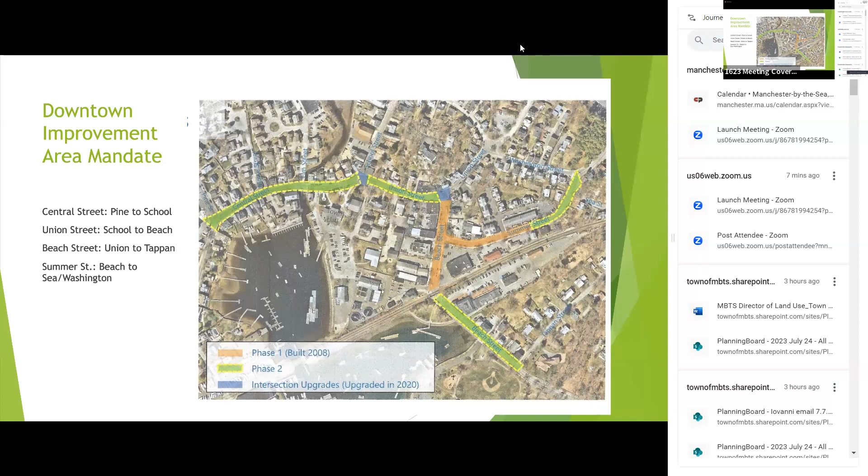Next slide, please. No, that one? Yeah, there we go. This is our secret master plan for downtown Manchester.

Now, sadly, that kind of look and feel and quality of maintenance is not the reality. And the motivation for this project is we have taken a very critical look at what the reality of Manchester's downtown infrastructure is compared to what we would like to see.

So the next few slides give you some pictures of what we are concerned about. A lot of these things we kind of look over because we live here and that's how it always has been, and we're used to it. But if we look at it from a critical point of view: is this the kind of place that a business would want to come to, that shows this town really cares about its downtown, that it's a high quality place to do business? Would people at some subconscious level see a place that is inviting, well maintained, and generally high quality? These are the kinds of things we're trying to get at.

There's too much of our downtown which has uneven, poorly repaired bituminous sidewalk. Many of you may walk down Central Street and take a close look underneath, or notice the absence of curbs altogether, or haphazard bituminous curbs rather than the high quality granite curbs that we're proposing to put in across downtown.

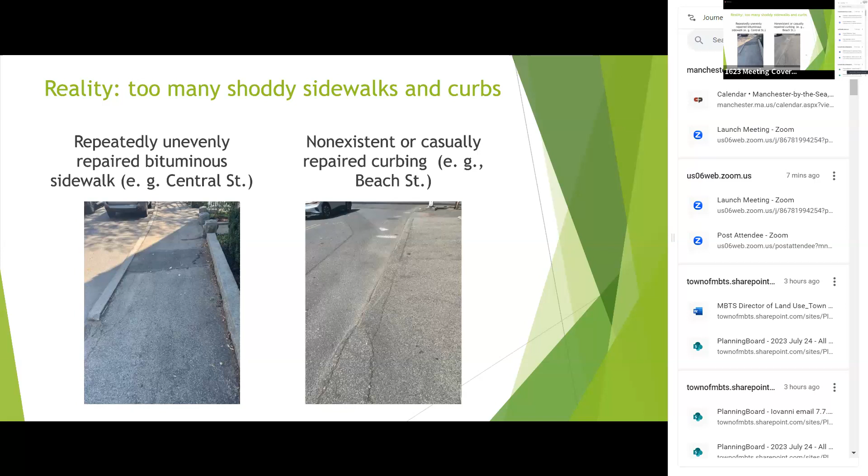Next slide, please. We also note that the introduction of modern amenities has been haphazard, and if you take a critical look, it really doesn't fit with the image we would like to have in a historic district. These look like they escaped from a 1950s horror movie. We would like to extend the historically correct lamps that were put in during downtown phase 1.

Similarly, there are haphazardly installed overhead wires rather than undergrounding. We should mention that DPW warns us that actually undergrounding them involves negotiations with utilities and may be very complicated, but for starters, we wanted to underground anything in the downtown area. Next slide, please.

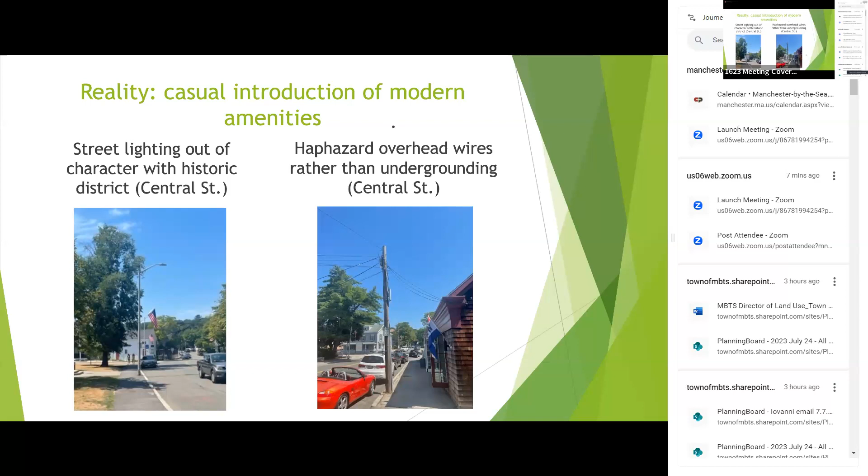The other thing that we paid a lot of attention to is pedestrian and bike availability and safety. There's not a lot of room downtown, but we've gone to great lengths to try to get the best possible compromises in place for all users, so that we have safety, mobility, and accessibility as much as we can without radically changing the picture of downtown.

So this is just one example where there is no crosswalk between Pine Street and Elm Street. That's one place where we're going to put in a fresh crosswalk. Similarly, on aesthetics and general amenities at the edge of the downtown infrastructure, there are a number of places where the railings are simply aging and ugly, and where we can use some more street trees. So those are the kinds of things that we're concerned about.

I should mention at this point that these kinds of things are entirely compatible with the civic space work, which has been briefed to us, and many of our members have been out in the field with civic space. They sort of just meld in with what we have here for the hardware and the infrastructure.

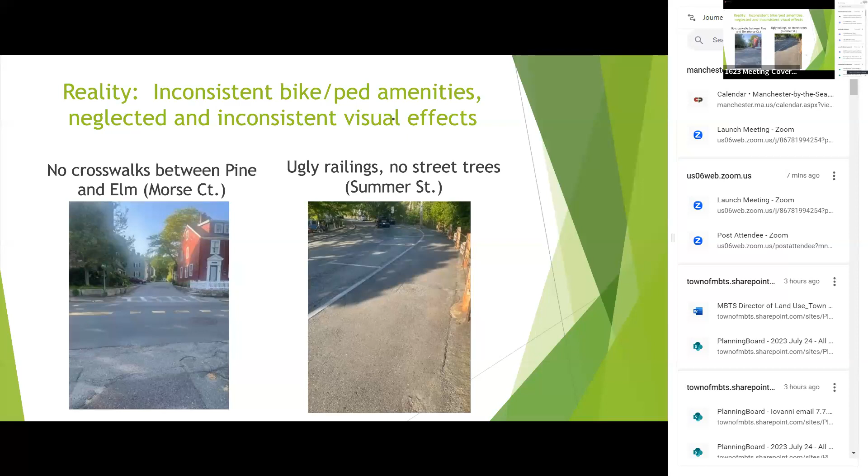Next slide, please. So just to sum up, what we're talking about here is consistent, high quality sidewalks, curbing, and lighting. We believe that since this is downtown, the heaviest use area and the most visible area, it is worth installing high quality cement sidewalks and granite curbs, which will reduce the cost of patchwork repairs. We're concerned, as we said, about safety and usability.

We would call attention to the fact that everyone is concerned about the advantage of having businesses in the limited commercial district, and that's fine. Our charge is to be paying attention to our existing commercial district. We want to have a place that's inviting for customers and new businesses alike.

I mentioned the historic concern that we have. And the last thing is that we want to integrate this with the other downtown public works, as has been done with the complete streets work earlier and will be done with culvert work. The idea here is that we may not do all this at once, but every time we do something downtown, we have this in the back of our mind so that it's all integrated work as it gets completed.

So with that, I'll turn it over to our professionals, Chuck Dam and VHB, who will explain this very professional, detailed work that has gone into implementing these general objectives.

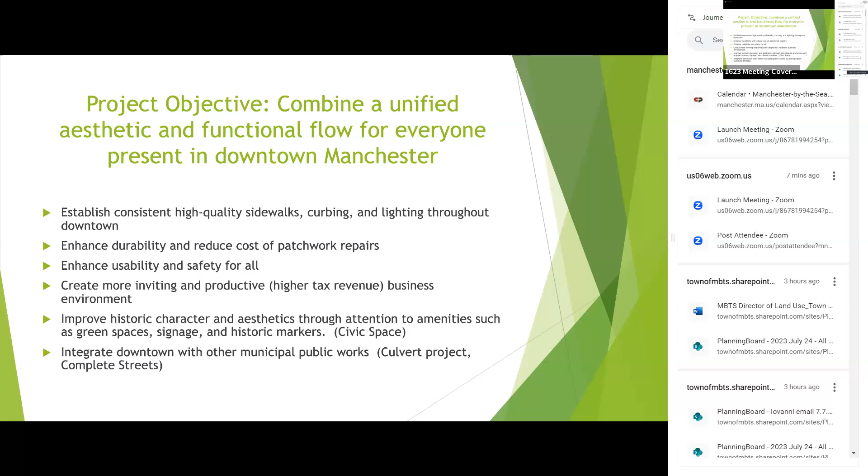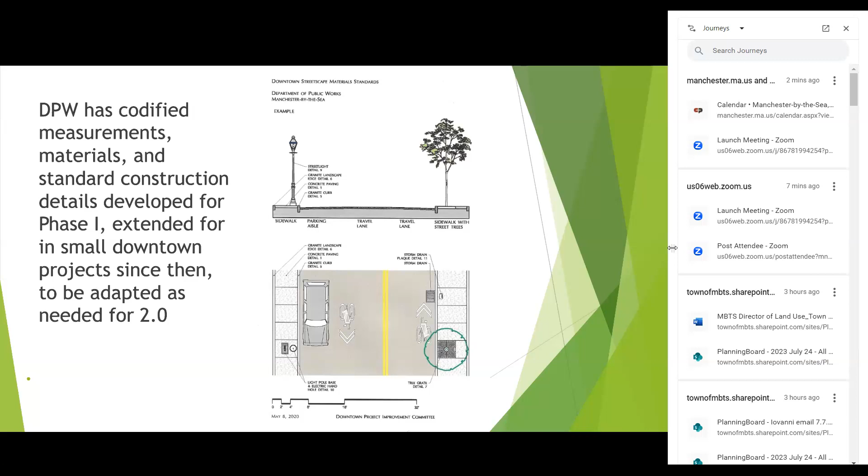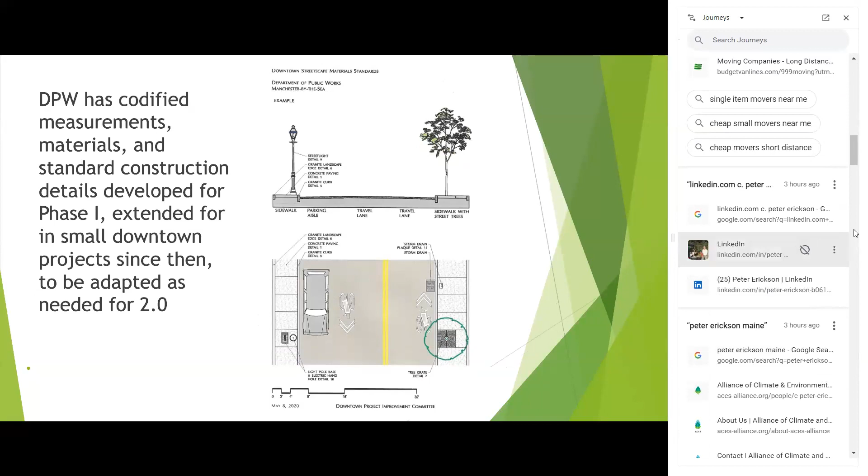Thanks, Steve. This is Chuck. I guess I'll hand it over to Elsa, who's our consultant with VHB, who gave a presentation. Can you hear me? Yeah, okay. I think she'd be the one to walk us through the project as she did a couple weeks ago with the select board, and I think it pretty much speaks for itself, but obviously we'll stick around and take questions afterwards. I'm not sure who's in control of the screen, but Elsa Chan is the consultant with VHB on the call tonight. If we could let her share her screen, I think she'll be able to walk us through it. What's the name? Elsa Chan. Okay, hold on.

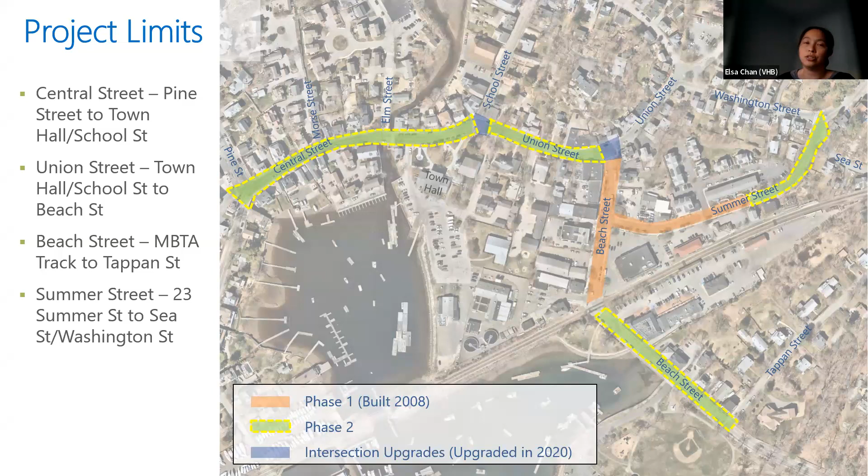Just looking back, Steve already covered the project limits. We're looking at taking the end of the project limit from phase 1, from Central Street, from Pine Street to Town Hall, and then Union Street between School Street and Beach Street, Beach Street, and then Summer Street, just east of where the project limits are from phase 1, and also along Beach Street as well.

So part of the tasks and scope we have is to solicit feedback from what you guys liked and didn't like about the phase 1 improvements, to understand what you guys are concerned about. A couple things we heard: retain the existing parking counts within the downtown area, improve safety and connectivity, improve the aesthetics, and use durable materials for the phase 2 portion of this project. So the first task we did was to identify existing conditions.

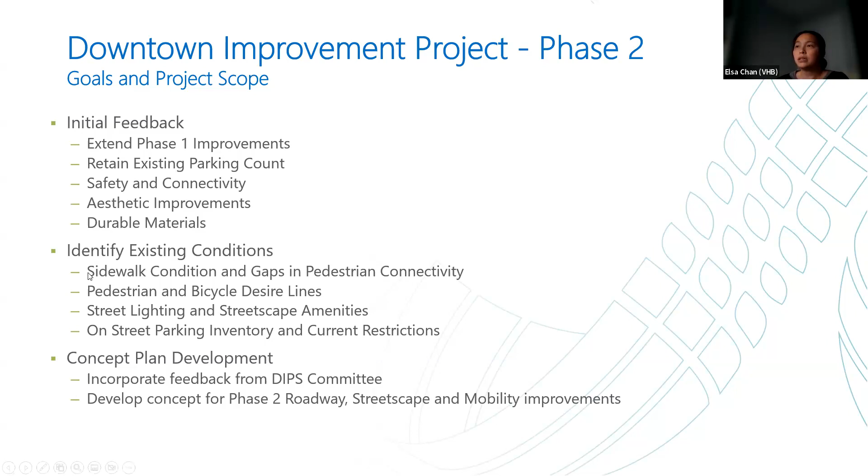We did a site walk to understand the existing sidewalk conditions and gaps regarding pedestrian connectivity, some of the desire lines, the existing street lighting and streetscape, and also the existing on-street parking situation and restrictions. Then we incorporated feedback from the DIPS committee based on the site visit and some preliminary conceptual design, and came up with the concept we're presenting here for the phase 2 roadway, streetscape, and mobility improvements.

Moving down to Union Street, right outside the library, based on our understanding there was a tree before and they pulled it out, so there's this awkward bump out located right in front of the library now. Moving down to the crosswalk, there are accessibility issues.

The curb ramps are not accessible. On the right side, the picture shows that because of the parking along this portion of Union Street, vehicles often have to cross over the center line, which creates a safety issue with people straddling across to the other side of the roadway just to bypass the parking.

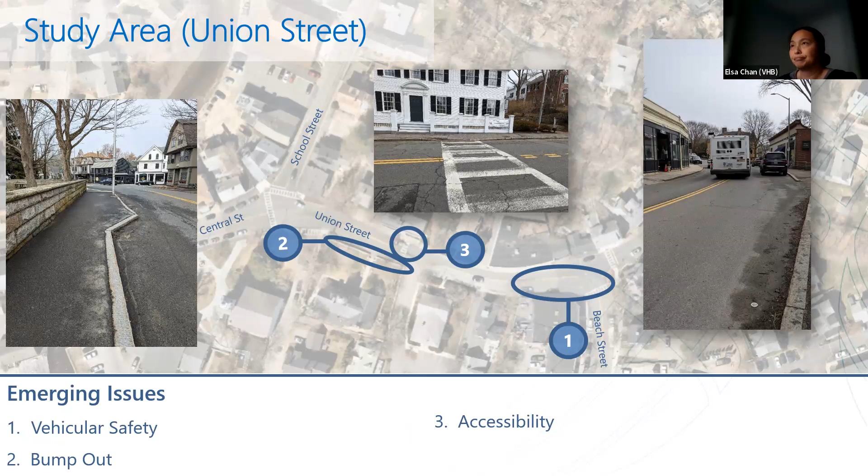Along Beach Street, some of the identified issues include pedestrian connectivity and wayfinding issues. The fence itself along Beach Street is also kind of antiquated, old, and not the prettiest looking. There's also a pedestrian safety issue right outside Captain Dusty's, especially during the summer months when it's pretty popular, so improving pedestrian safety at that location is needed.

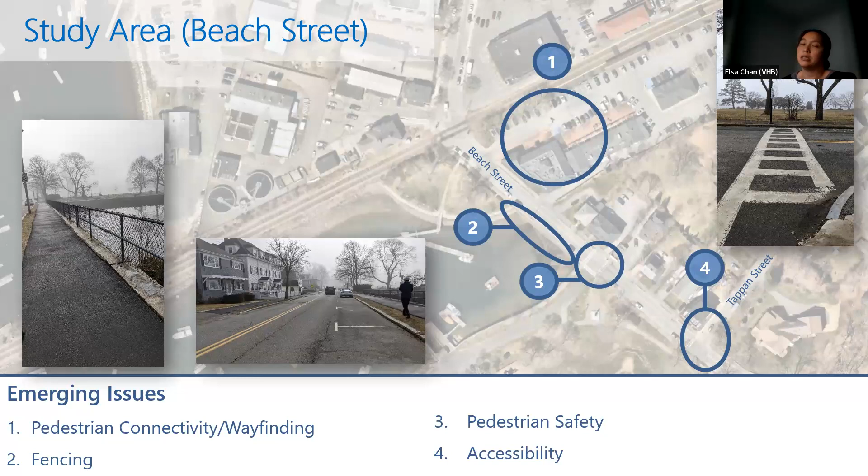The fourth issue is at Tappan Street, the crosswalk. As you can see here, there are no curb ramps - it just literally runs into the curb. Accessibility is an issue at this location.

Along Summer Street, the Sea Street at Washington Street intersection has some challenging operations and safety issues, especially from Sea Street - it's kind of hard to see people coming southbound on Summer Street. There's also no formalized parking, even though there's 2-hour parking along this stretch, so it doesn't look very inviting for visitors to park here. Lastly, the guardrail and railing alongside this stretch of Summer Street is substandard as well.

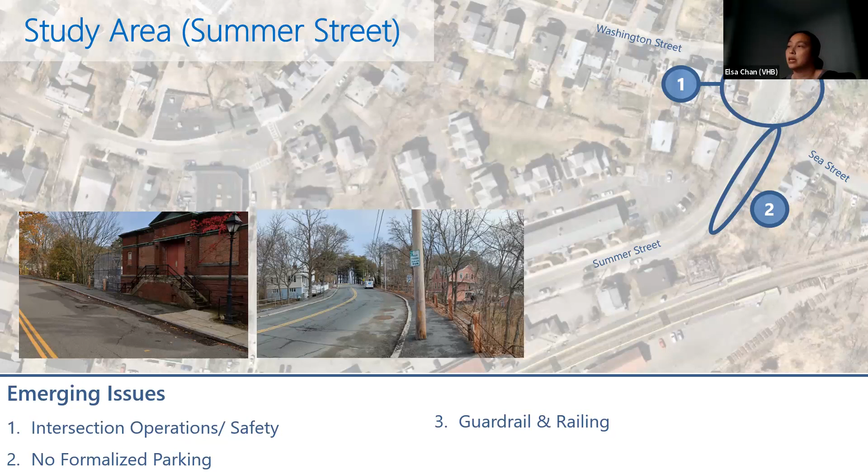We talked to the DIPS committee to understand the extent of improvements we want to see under phase 2. We want to echo what phase 1 had: upgrading sidewalks to cement concrete, upgrading curb ramps to be ADA compliant. However, we want to keep the curb lines as is, no significant roadway construction, and better define parking and improve crosswalks and crossings along the project limit corridors. If we do have to reconstruct curb lines, it'll be more toward improving pedestrian safety.

As far as study area-wide improvements, there will be new sidewalks and curb reset along the corridors within the project limits. Pedestrian and street lights will also be upgraded as part of this downtown improvement phase 2, upgrading accessibility at sidewalks and crosswalks. However, we want to maintain the existing pavement width and existing parking within the study area, and also improve the landscape at the sidewalk along Beach Street and at the park edge.

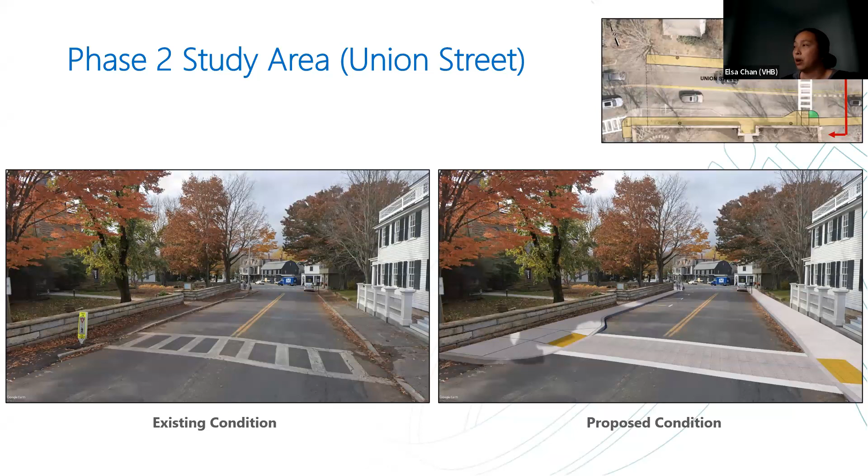Down to Beach Street - the existing fencing will be upgraded to decorative bridge railing, with new concrete sidewalk. We'll also provide a grass or paver buffer adjacent to the sidewalks. Right outside Captain Dusty's, there's a raised table being proposed, which aside from increasing visibility of pedestrians, also serves as a traffic calming measure to lower speeds along this stretch of Beach Street. Lastly, all the curb ramps and crossings will be upgraded or constructed to be accessible.

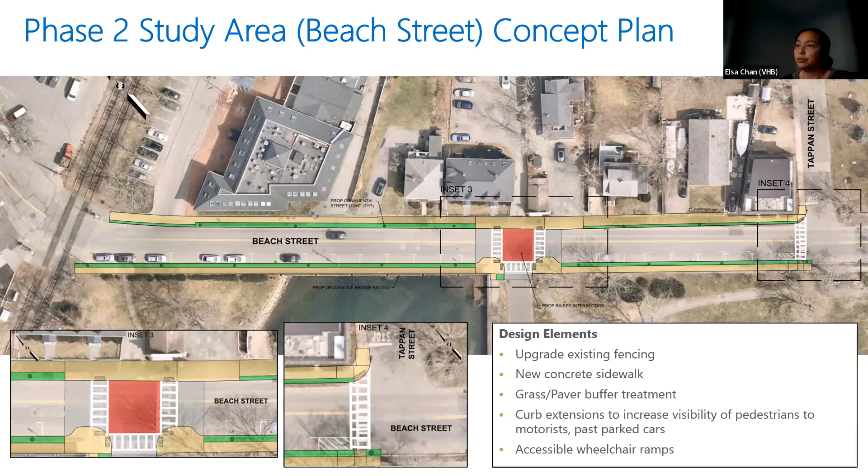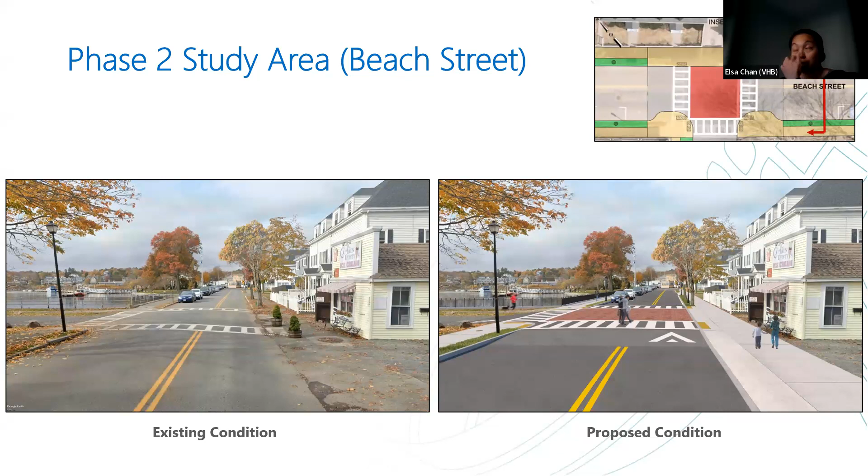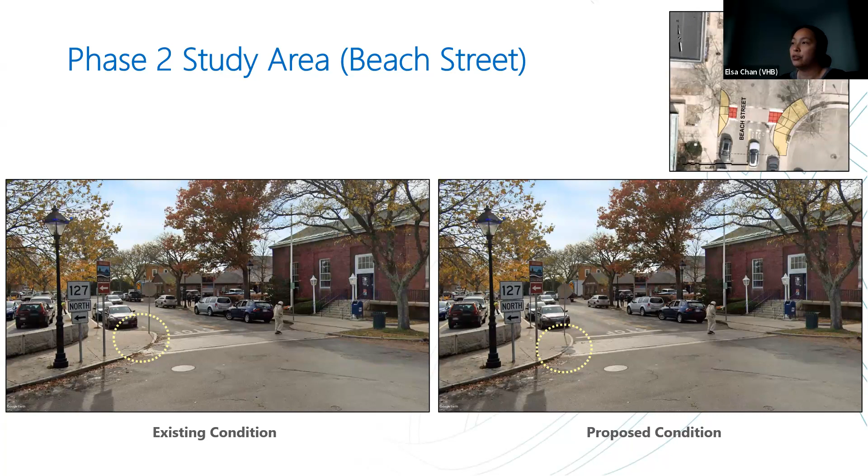This one is kind of added in afterwards. This is right outside the post office. You might not see it as well here, but on the left side is the existing condition. It was brought up that the space right in front of that circle is kind of hard to back into because of the angle of the curb over there, so we proposed to cut it back a little bit. You can see on the right side it's cut in about half of the car, just to make it easier for someone to back into that spot.

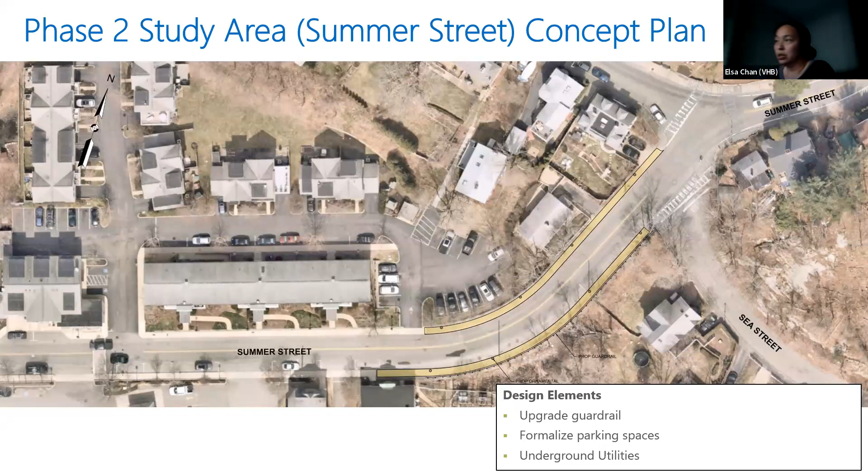And then along Summer Street, some of the design elements we've incorporated into this conceptual plan are to upgrade the existing guardrail so that it meets current standards, and also formalize the parking spaces, providing some wayfinding so that visitors can know there are spaces to park along this stretch of Summer Street. There are also some utilities here that would be good to underground, but these are more long-term improvements that would require coordination as well.

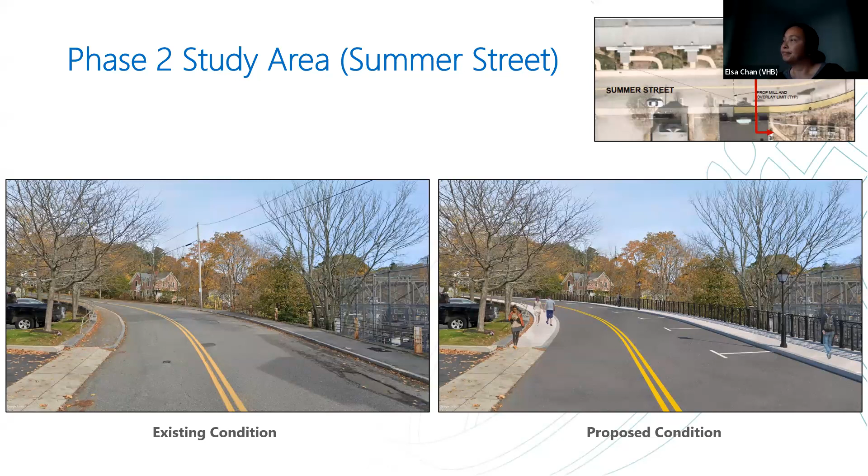So here's a cross section you can see on the left, which is the existing condition. On the right side, as you can see, there's some ornamental street lighting, some formalized parking spots, the bridge railing that's been upgraded, and then concrete sidewalks along both sides to tie into the phase 1 project limit. And then that's it.

So this is what our committee has been working on, and after a lot of work with our professional colleagues on compromises and trade-offs that we thought were optimal, we're recommending that to our elected leadership.

The proposed lighting, is it similar to what's in town now? It is. It will be updated, there have been some technical problems and improvements identified with the exact fixtures we had before, so that will be updated, but it will be visually the same.

So Ron, may I speak to that? A lot of them were blown out. Yeah, so the intent is to provide consistent design all the way through, be it curb line, be it concrete sidewalk, be it the lighting features, a little more consistency. One thing on Kurt's mind, and mine too, is we try to provide a consistent, clear path for traffic as it travels all the way from the Beverly Farms side, through the town, and exiting towards Gloucester.

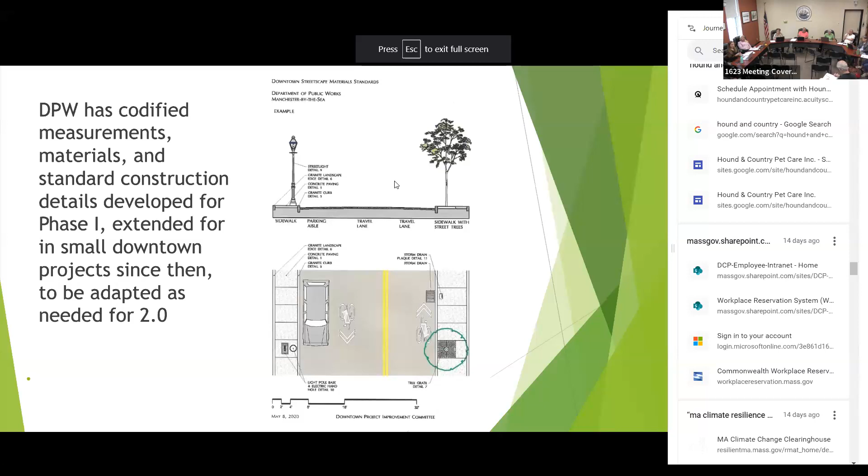When you're going up, let's say Laughing Gull is on your left, can you bring that up? Even in front of the mooring is a perfect example too. I almost got killed there, that area, but it's consistent. I know it's a catch-22, we need the parking, we don't want to get rid of a spot. Is that a place where the curb lines maybe have to modify to maximize both the sidewalk and enable whatever parking is needed?

Parking in front of the mooring and the Manchester by the Book doesn't make any sense to me because it's so difficult for a biker. So in front of the mooring is one spot, and then if you're going up Summer Street you've got Laughing Gull on your right, and you're going up by the old cemetery on your left, winding up the hill there. There's parking spots, and I always laugh a little because there's no way a car could be parked and a car could come down without somebody pausing. So I'm wondering if within this plan everything's staying the same size, or are we going to try to accommodate so we aren't going into oncoming traffic to get around parked cars, like you do in front of the mooring. I really hope so.

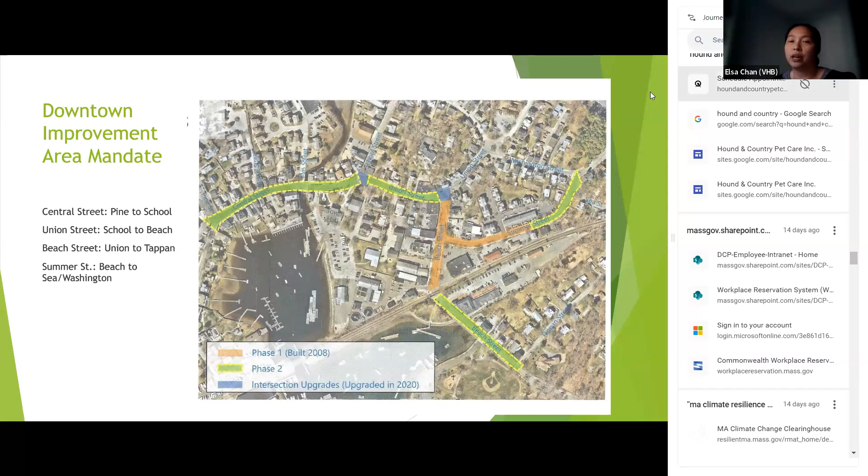Elsa, are you still on the line? I am. So with regards to Summer Street, there's actually existing parking out there already. We're just kind of putting parking spaces just to formalize that. It's not really changing the width of the road or the travel lane. Everywhere we're trying to achieve is to have 11-foot travel lanes along the roadway there.

But at no time are we going to reduce the width of the travel lanes below effective design principles. Correct, so we want to make sure there's minimum width. I'm not sure exactly how to answer your question, other than we'll certainly look at it.

Maybe nothing can be done, but I see it on School Street, Lower School Street, where we have a parking lane but a car can't actually fit there. So they're over the line when they're parked. That means the car coming down can't fit if a car is coming up, right? So it creates all these little pockets in town that get risky.

So noted. Thank you. We certainly heard the question. Thank you.

We call that character in Manchester. I know, character, that's what it is. A what? Character. I didn't hear it. Character.

So no, I call it really dangerous. And I've asked this question over and over again. If we're spending this money and we're doing it, we're keeping the situation dangerous. I have to travel down School Street all the time. I think if there's not enough room for a car parked and someone to travel on a main thoroughfare in town, we need to eliminate the parking.

It's not safe. Specifically School Street, we just paid a ton of money. People, it looks ridiculous that cars are parked over the line and you need to go into opposing traffic. I've sent several emails. We can take School Street at a different time, but the fact is that the bylaw is what allows people to park in this town, not the lines.

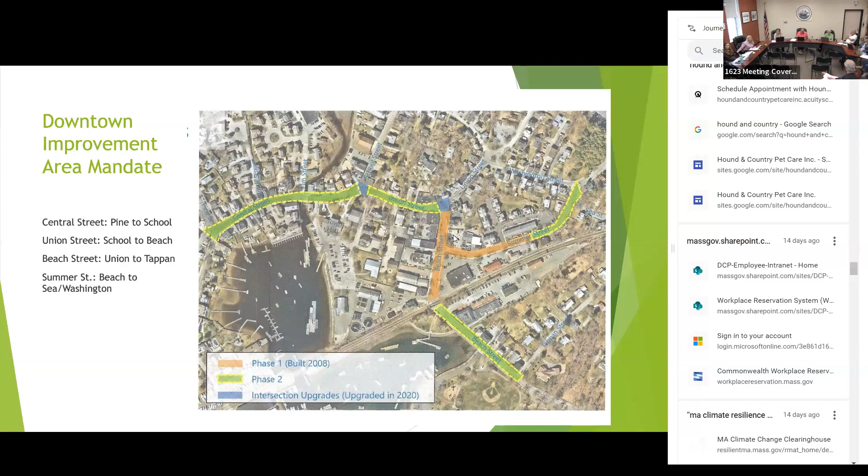It was in the first scope. No, it was in the other one, it was in Elsa's, what it might look like. Pull up that slide if she's still around. Yeah, she's still there, sure, I can do that. Hang on, I think it was like the first intersection, if I'm wrong.

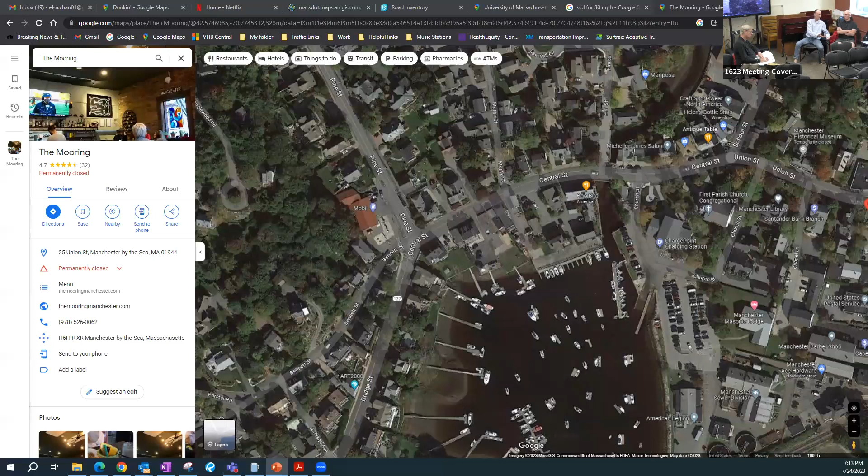I wholeheartedly agree with you. I live right there and I can see it out my window of my house, so I hear all the cars going through there. It's definitely not something we've done as part of this, but it's on the table, that when we do any implementation, this is part of it, because that's one of the worst intersections.

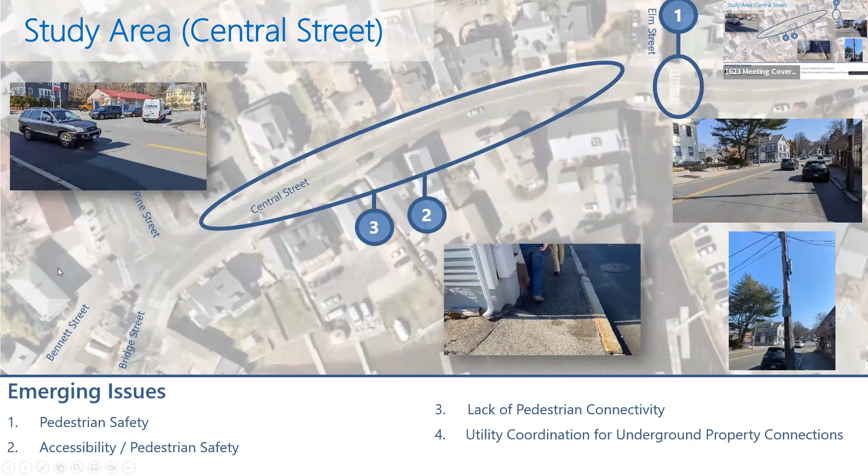You mean here? Yes. Outside your structure? Yeah, that's- oh yeah, okay. Picture up but on the left, there was a slide that showed the sidewalks. Maybe it's the next one then? No, I think actually, yeah, that's it, this one. So I think if I'm correct, the gas station is like to the left, that whitish area.

So this doesn't allow anyone to come down Pine and go left, and then to go right towards Beverly. You mean a pedestrian or a car? Pedestrian.

So this is something we are anticipating working on, a different design for the intersection itself. So what's shown here is the improvements we would make to the sidewalks and curbing to continue the look and feel as discussed. The actual turning movements and pedestrian movements within the intersection need to be vetted out against actual traffic counts, morning peak, afternoon peak, things like that. That's part of a separate scope, which wasn't included in this initial study, and that's why we haven't shown any improvements on the corner with the gas station.

Wasn't there a rotary there once temporarily? That goes back to the Complete Streets project. We had several different things that were tried, none of which worked or were received with good acceptance from the community. So we're back to square one in terms of addressing that intersection, which again, as Chuck said, is a separate project from what we're looking at tonight.

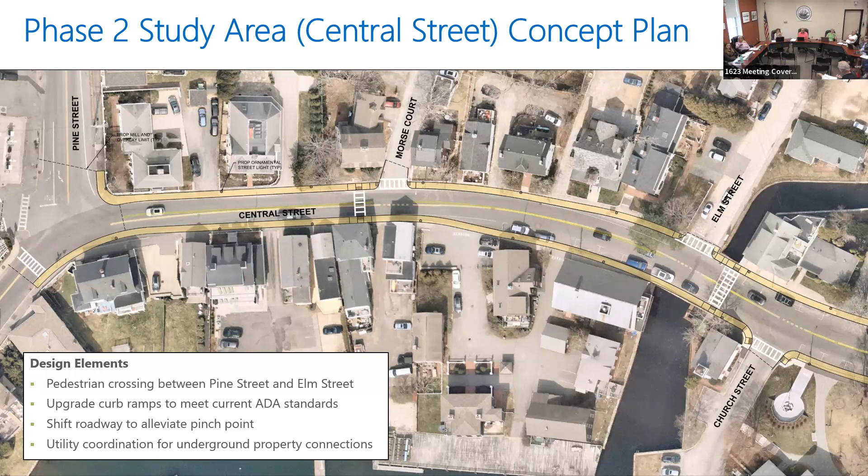So this is a conceptual level design where we have evaluated a few different alternatives within the context of the area that was shown. The next step would be to go to an actual design where we would incorporate a full roadway survey of the area, and there might be some instances where things need to be tweaked here or there to shuffle, but in general, the concepts are as what's shown.

If we can keep the parking at the mooring, that is certainly the goal of the project. If the project has to remove the parking at the mooring, then that will happen at that time, but it's premature for us to do it. As shown on that screen, there's 2 11-foot lanes with the parking, so there's no need to show it removed right now, but once we get the final design with the actual surveyed layouts, then there might be some tweaking needed. So we shouldn't get into the details on 11-foot lanes and parking here and there. The general concept is what's important right now, and we will be back with additional work as we can complete it. So I think that's what needs to be taken away here.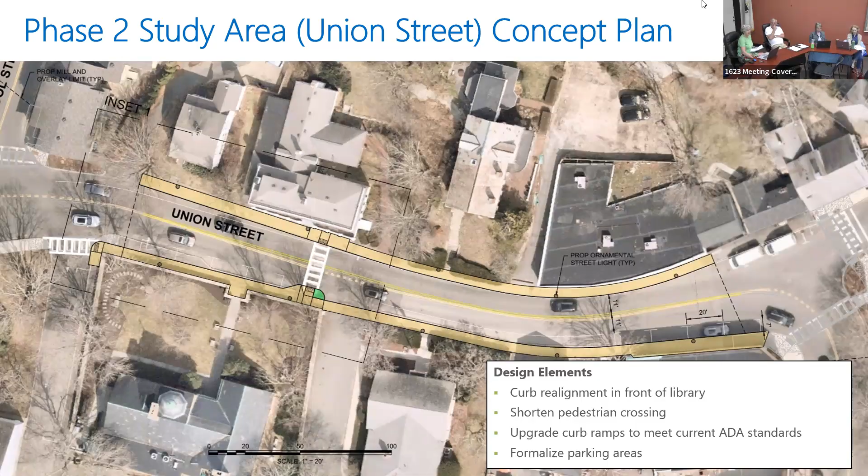So you're suggesting, Sarah, that we leave the bump out as is? Yes, absolutely. And there are plenty of places for people who don't know how to back up their car to park at other places. You park up on Summer Street. So that's just that piece of history, for whatever it's worth. That particular bump out on both sides by the post office was just hotly contested and widely criticized, but for whatever that's worth.

The other thing that I just wanted to raise is I bike a lot. Is there a way to actually safely direct cyclists, not kids, but cyclists, to bike from the Pines, the intersection we were just talking about, through to the track, say, biking in the middle as traffic? That's how I ride it. I ride in the middle of the lane to encourage that. It slows down traffic. People don't need to go faster than I can bike, which isn't very fast. And you guys know, VHB and others know that, but how do you get people to actually get cyclists to be part of the solution?

And the other thing is, there are cyclists who pass me on the right when I'm driving a car. So let's get some enforcement on cyclists too. It's a system, and I don't think cyclists are entirely without fault in the safety of it. And I would encourage our enforcement people to enforce the speed limits for cyclists and the safety and the stopping at stop signs.

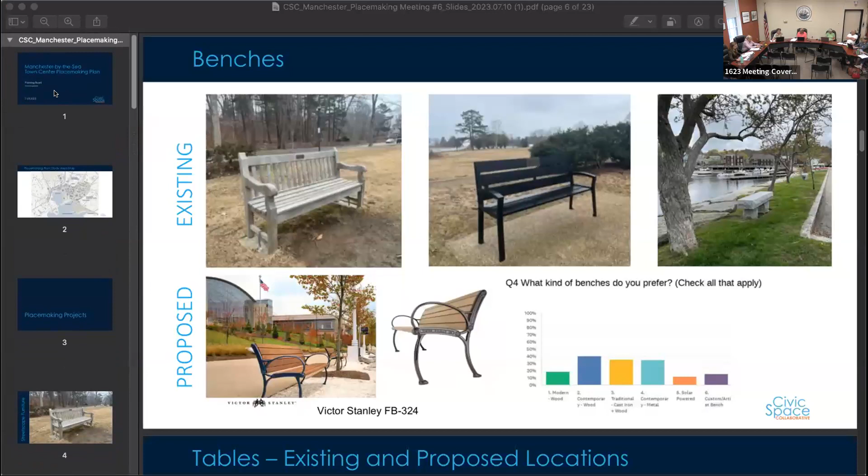We've seen this. Civic Space Collaborative was a consultant hired before I came on board. This was a grant with the Mass Downtown Initiative Program. They also came in and worked with Tiffany on Skating by the Sea, that was another grant. But this one was specifically on placemaking in the town center. Daniel and Claudia were both involved in this.

Take it away, Daniel. Well, thank you, Betsy, for the intro and for introducing us to so many wonderful people in Manchester, and for helping to coordinate feedback as we were assessing the existing conditions and generating ideas. Also, thank you to the folks from the Downtown Improvement Committee that I saw in the meeting.

We met with them 5 times over the course of this project, so their input was really helpful, as well as members from the Bike and Ped Committee, the Historic District Commission, the Historical Museum, and the select board, who we've met with throughout this project. At least once, but we have not met with the planning board yet, so I'm excited to share the results with you tonight.

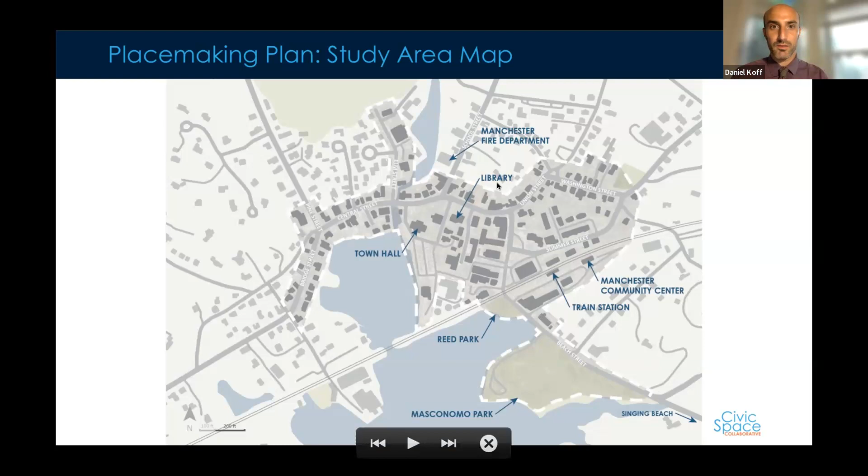Working with the Downtown Improvement Committee, we selected 4 different projects to focus on: streetscape furniture, wayfinding, public art, and public restrooms. I'll go through each one, showing you what we learned and what we're recommending to shift.

Also, there are some tired benches in Reed Park as well that could use some updating.

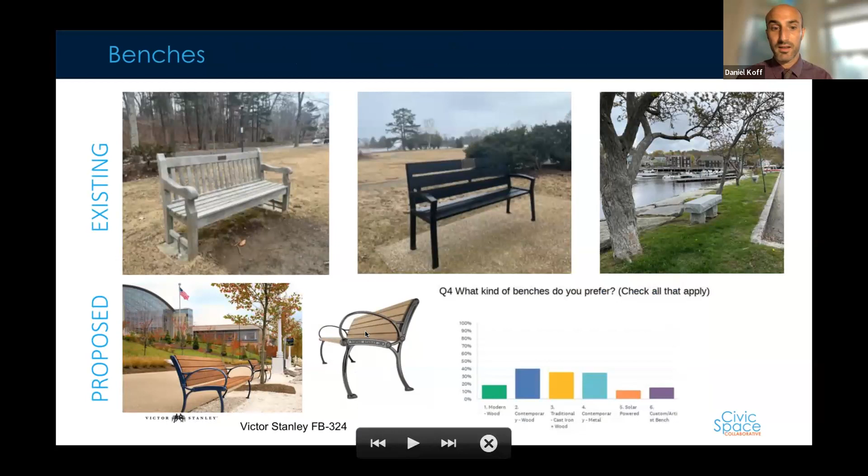Since you have an overabundance of these granite benches, especially around Reed Park, we're recommending that you sunset that granite bench memorial program. Those benches will last for eternity, which is great, but they're also not super comfortable to sit on. So we're suggesting a more functional bench moving forward, but that you continue this memorial program, which has been a huge success, as you see from the wide variety of benches you've been able to install.

All right, so moving on to tables, which is the flip side. There are very few tables to sit at downtown. And that was one of the things we noticed - there's not very many places where you could grab a bite to eat downtown and then bring it to a public park and enjoy.

There are a few traditional style picnic benches in Masconomo Park, and we're recommending new tables in Reed Park, potentially some in this pocket park, and also in this area by the town landing, which we think could be a nice little parklet area with this inner harbor improved.

There are also, I should note, some lovely benches and tables and just a wonderful collection of streetscape furniture at the library. This is a great example of how a cohesive collection of furniture thoughtfully placed can create a wonderful space.

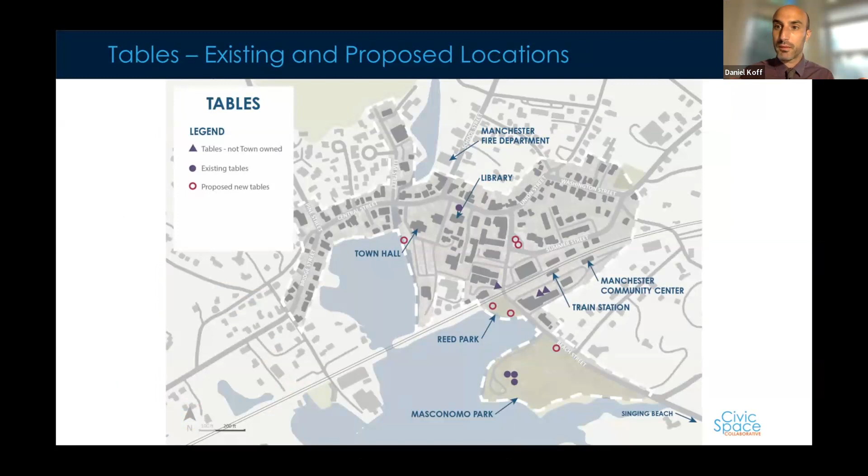Would that be on grass or on pavement? So we're thinking that in Reed Park specifically, you would put a pad of brick down, and it would sit on the brick, similar to this - not being on grass like this one.

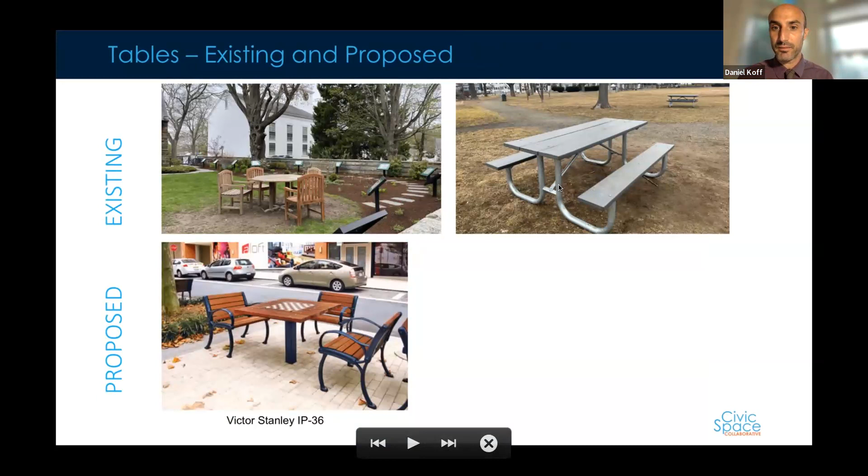We also looked at trash receptacles. There are a few existing of various forms. So we're recommending this could be a good way to create more consistency downtown - to create a more consistent selection of them and make sure they're scattered around places where people are going to be walking.

So we have one down by this pedestrian pathway, again by the town landing. I think you could have one adjacent to the town hall, the new pocket park, and along Beach Street.

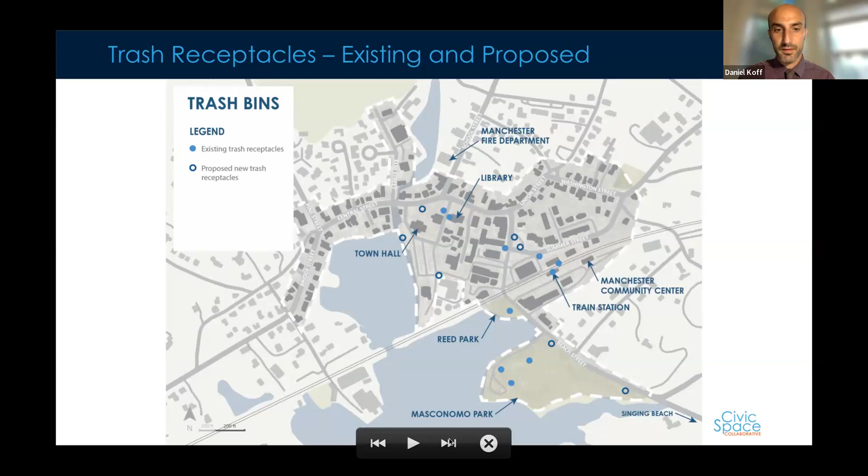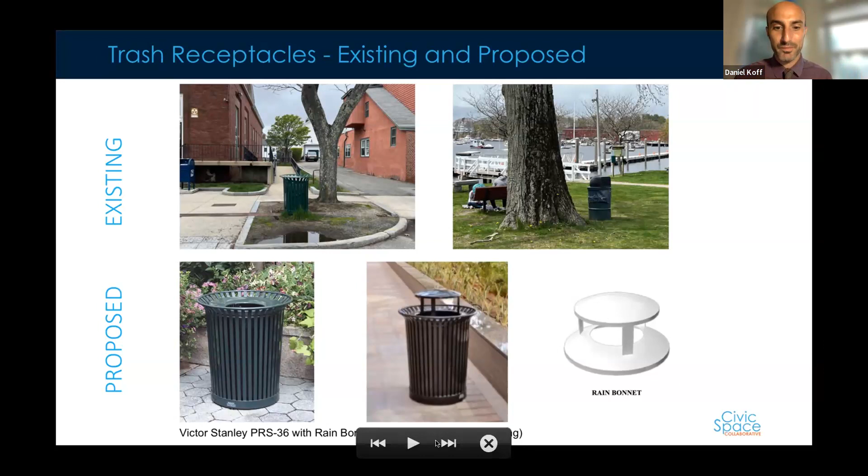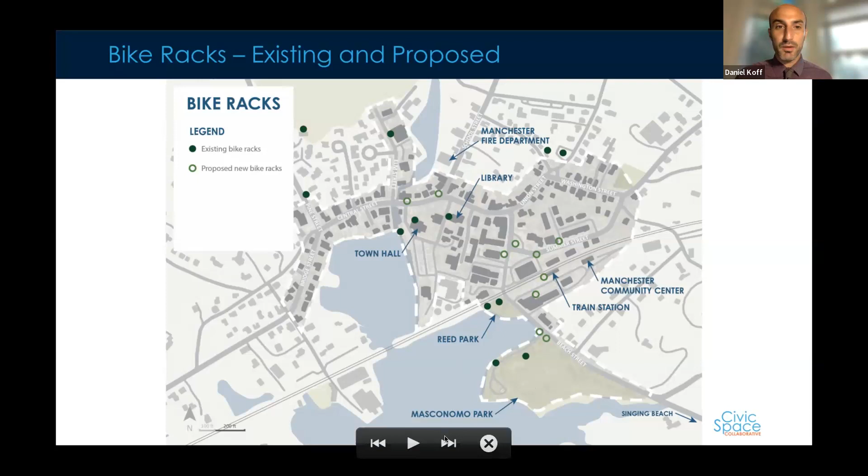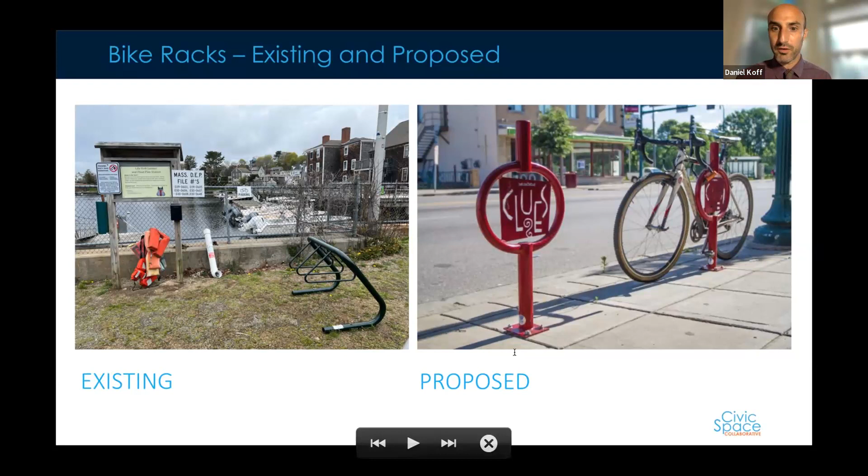Moving to wayfinding, what we found is that there are quite a few signs, specifically for business directories, that are on the street. There's a lot of vehicular signage, but the signage for pedestrians is somewhat lacking.

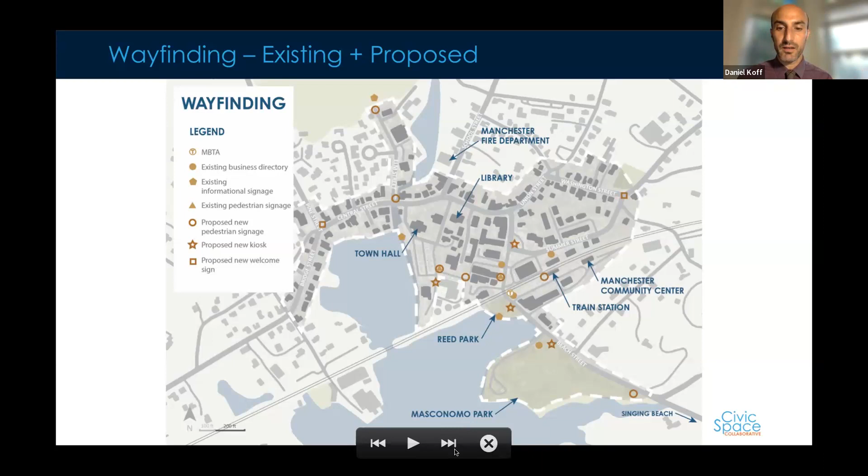There's also room for pedestrian signs to be improved, specifically to encourage people to use the pedestrian walkway connecting from Beach Street to the municipal lot. That could be folded into the kiosk RFP in the future.

We're recommending that for these temporary signs, it's a great pilot project, and you could move forward on a more permanent basis with a more robust post and more permanent directional arrow signage to encourage people to use that pathway.

For the kiosks, there are a few different models—a multi-sided kiosk, or a double-sided kiosk, and kiosks that unfold. If you hired a wayfinding designer and put together an RFP, they could walk you through those options and come up with something that would be great for the town, helping pedestrians navigate the space and learn about the history.

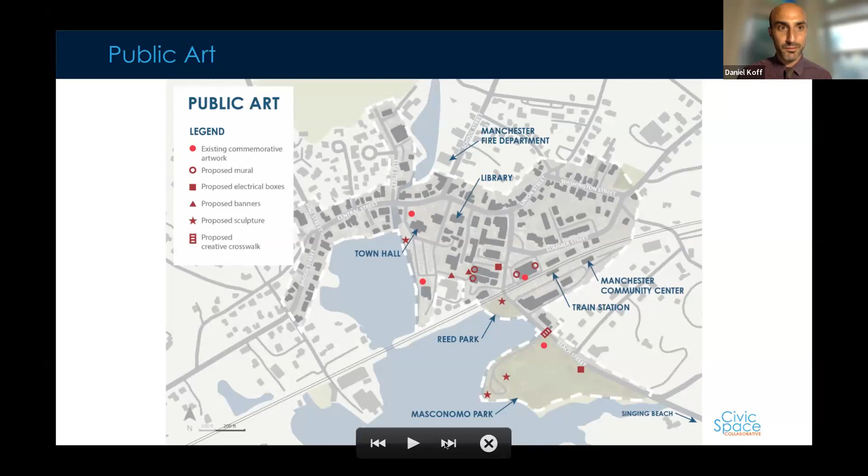And lastly, public restrooms. I know you all put a lot of thought into public restrooms and heard a lot about how building out more restrooms could be a way to create more of a welcoming space for visitors.

So we walked downtown with Jim Brown, an owner of a lot of these buildings, who has a very intimate knowledge of the restroom situation.

And we found that restrooms in local businesses is limited for a variety of reasons, and that relying on local businesses to provide public accommodation is not really feasible.

So it's kind of up to the public here, the municipality, to provide those resources. There is a restroom at the library, and we recently found out there is one at Town Hall.

That restroom is now open 24/7, thanks to a realignment. You go through the police station, I believe, and you can access it.

So that's wonderful, but it's not widely known, especially for people who are getting off the train and going to Singing Beach. So we considered restrooms at all of these different locations.

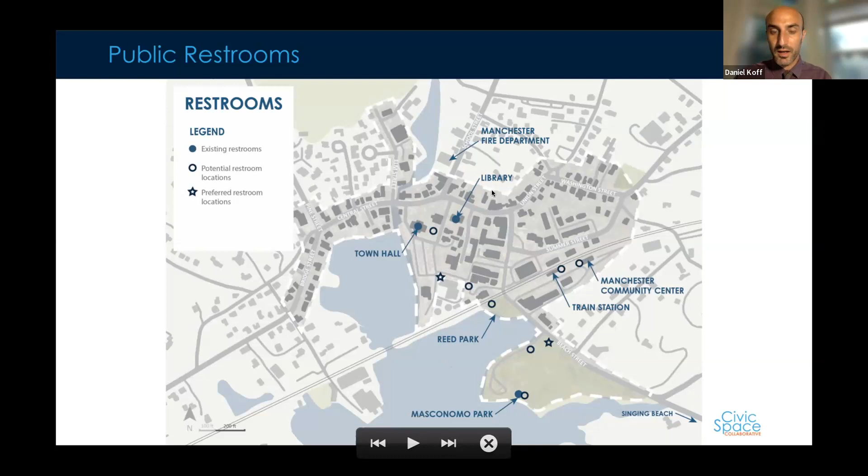As far as next steps, an overview: I think you're already ahead of the game with some streetscape furniture recommendations. We recommended installing four updated benches at Masconomo Park - I believe those have already been replaced with new teak benches, which is great. The next step would be to do the same thing at Reed Park, and think about going with the Victor Stanley bench instead, something with a cast iron support, more traditional feel.

Installing new trash receptacles with rain bonnets would make the downtown more welcoming, and installing bike racks on the street would also be more welcoming to bikers, so they don't have to bike into a back area to find a corral.